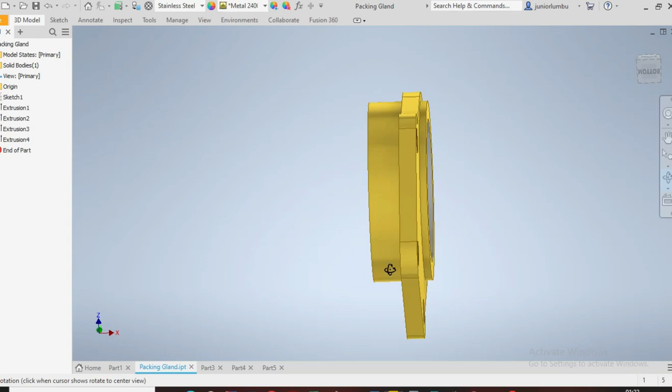Let's show this figure in front of us. So this is a packing gland. Our dimensions are in millimeters.

So what we're gonna do is we're gonna come on new here. We can pick metric standards millimeters and say create. So here we are going to start with a rectangle. You're gonna come here, then we say it's a rectangle.

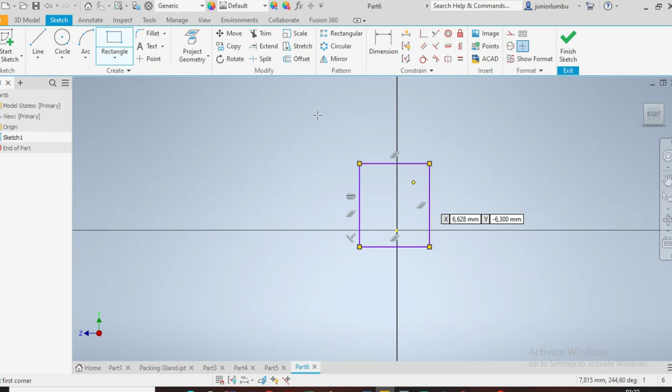Then after that, I'm gonna join these two points. There we go. Then I'll come for the circles, the first one, the second one, and the third one. Then I'll draw this one, then that one, here this one, and that one.

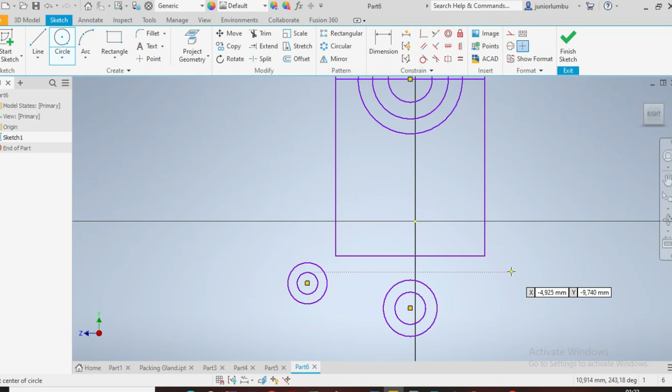There again, I don't want any constraint here. So this one and that one. I want this to be equal to this one, okay, and that to be equal to this one here, and again this to be equal to that one, and that to be equal to that one.

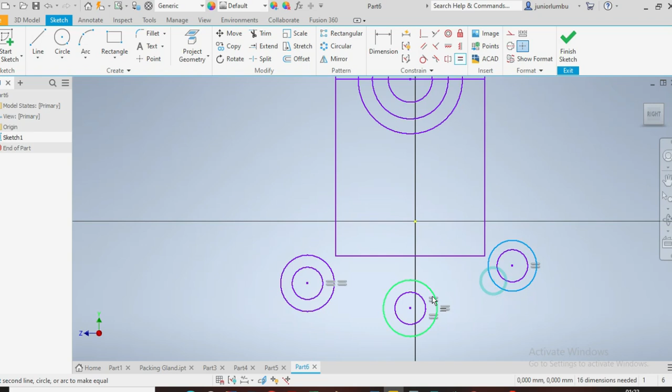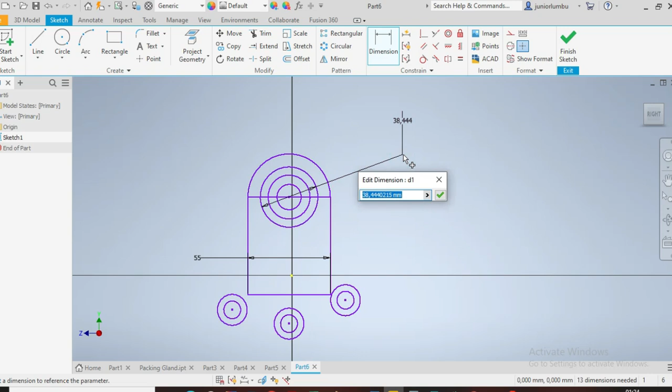Now that I have this, what I'm gonna do next is give dimensions. So this one here needs to be 55 millimeters. That one there needs to be 50 millimeters, that needs to be 40 millimeters, and the last one needs to be 36 millimeters.

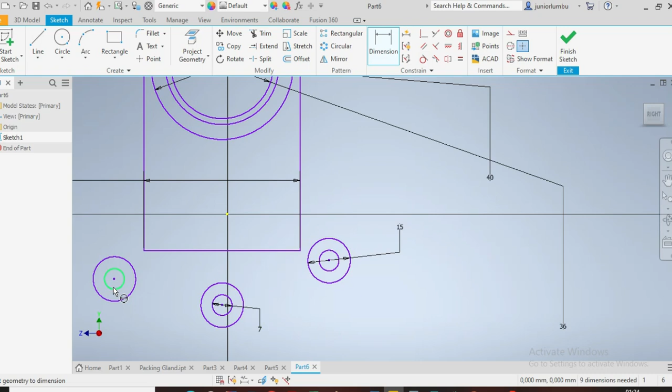Once I have that, I'm gonna come for this one. So that one needs to be 7 millimeters, and this needs to be 15 millimeters. So I want from here to there to be 25 millimeters.

And from there to there to be 50 millimeters. And between that one and that one, I need to have 25 millimeters, and between this one here and that one, I need to have 25 millimeters as well.

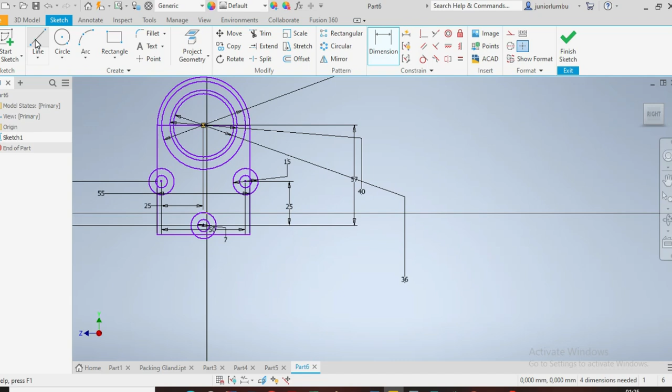Alright, now from there to here, I need to have 57 millimeters. Now that I have that, I need to make sure that this line here goes up to the edge, even this one. This one goes up to here.

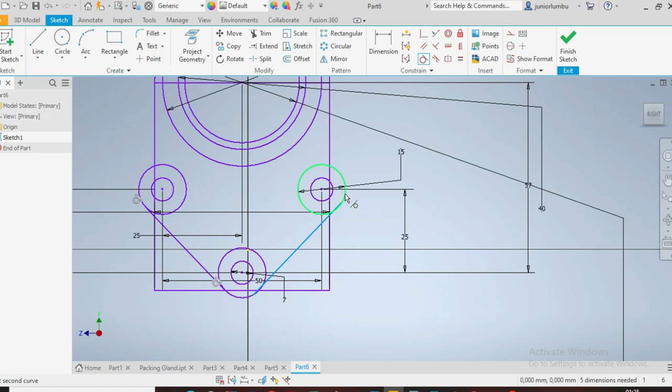Right now, I'll make sure that this line is tangent to that one, tangent to this one, that one is tangent to that one, and tangent to that one. This in place. Now I'm gonna go into the 3D model.

Here, I'm gonna go and extrude. So I'm going to extrude this part here. Let's try the other side so that we can see clearly what we are doing. That's one and that one.

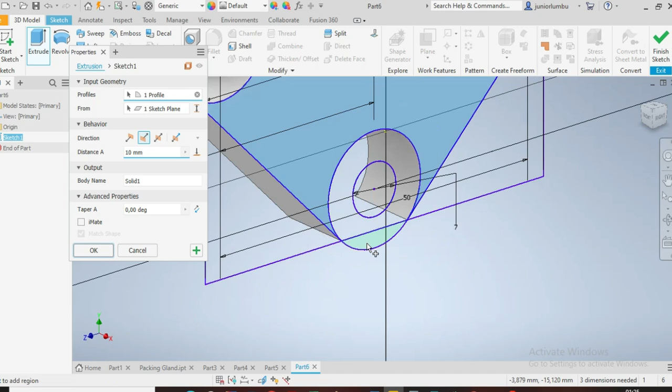Okay, and here I need that part there. I need this one as well and that one. Coming here, I need this part here and that one. Then that one. And this one here.

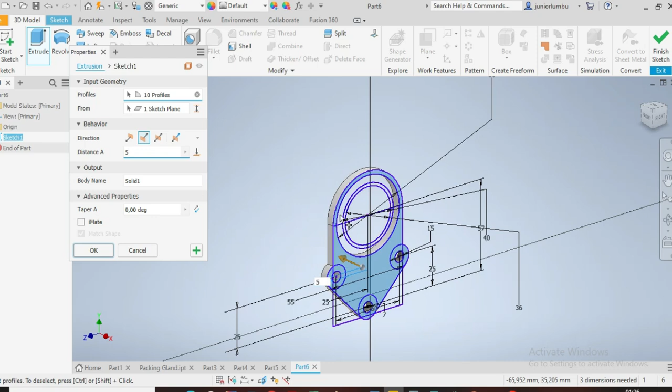Now that I have that, I'm gonna come here and say 5 millimeters. So I need to extrude it by 5 millimeters, both sides of our drawing plane. Then I'll come here. Now I have it this way.

Then after that, I'm gonna say plus. Now I want to extrude this part here and that part here by 12 and a half one side, 12 and a half, which is that side, and 4 and a half coming my side, as you can see.

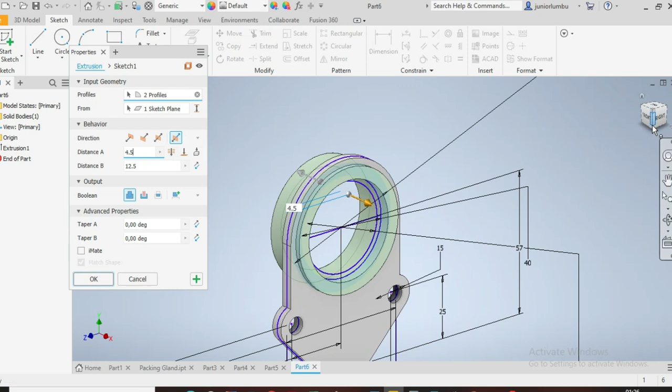Okay, now I say plus. I'm going now to extrude this part here. All right, the other way around. So I will say one side only.

It needs to go by 12.5. Okay, 12.5. Then I'll say plus now.

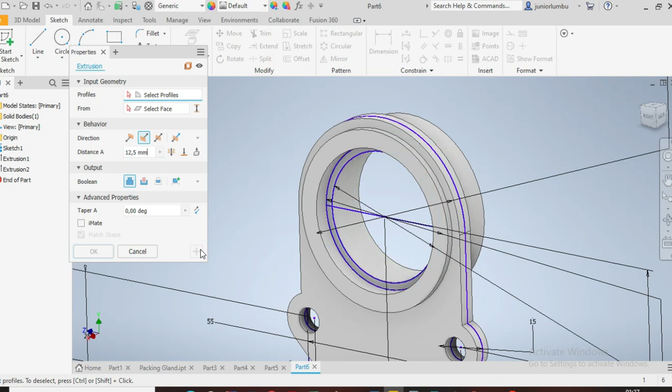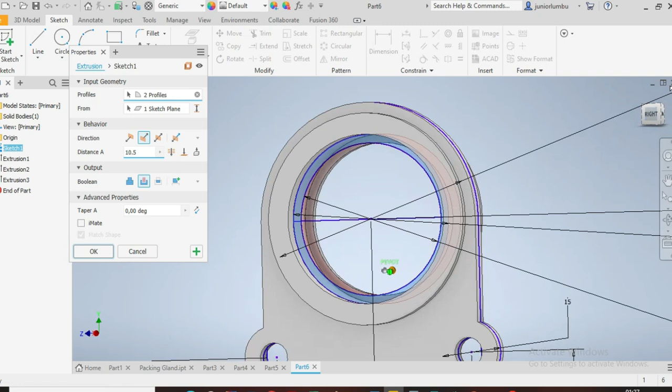I need to cut it down, so I'm gonna cut so that it can remain with 2 millimeters hanging. So I'm gonna cut by 10.5. So 12.5 minus 10.5 gives you 2. So now this is how you have it there, hanging. Then, okay, now you have your figure in front of us.

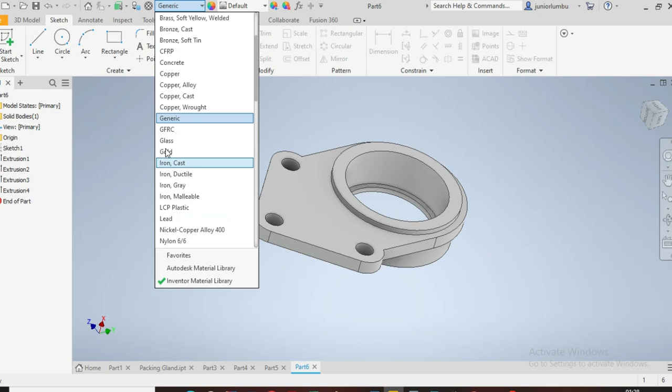As you can see, what you're gonna do now is give it the material. So you come here and say carbon steel. We can go with carbon steel. Where's carbon steel? There we go. Now you have everything properly done.

It was a pleasure of mine sharing this video with you. I hope that you enjoyed it. I hope that you're gonna enjoy it.